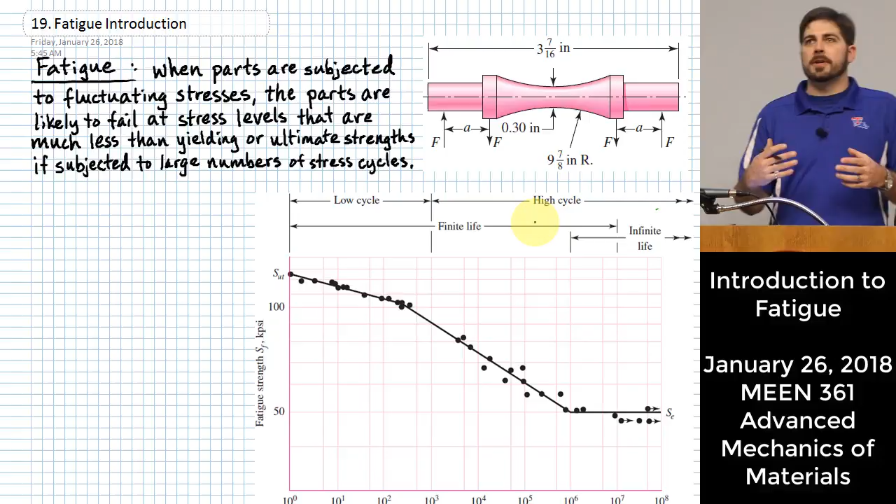It matters to us because one of the things mechanical engineers are expected to do is evaluate things for suitability in certain types of equipment where there are moving parts, where some sort of process is happening, and often that process is cyclic in nature.

Think about, for instance, an internal combustion engine. You've got a connecting rod that connects the crankshaft to the piston. As that crankshaft moves around, the connecting rod, during some portions of the cycle, will carry very large amounts of compressive stress, and in other parts of the cycle it may carry tensile stress. The engine runs at a fairly fast pace, so there can be a lot of cycles of load on that connecting rod in a fairly short period of time.

So what we're talking about with fatigue is basically this: when parts are subjected to fluctuating stresses, you can have situations where parts don't carry just one stress. The stress changes over time, and sometimes it can change rapidly, swinging from compressive to tensile to compressive.

As that stress changes, what happens inside the material is that there are a lot of little micro discontinuities inside the material. Wherever there's a micro discontinuity, it's likely that there might be a tiny bit of yielding at a very localized, microscopic location in that material.

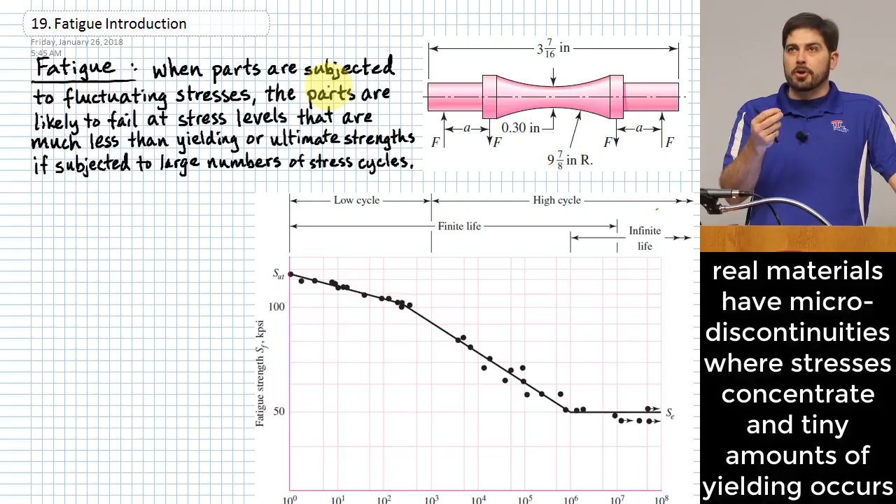So what goes on is that in that material, any place where there might be a little microscopic discontinuity, it kind of behaves as if it's a little crack right there. If you start causing yielding in one direction and another at that micro discontinuity, it actually starts to break more bonds, and the bonds it breaks might be in surrounding material right around that discontinuity.

As you keep doing it, all those little broken bonds that may not have been able to heal back up, due to the ductility of the material or whatever, all those little voids where you don't have bonds tend to start coalescing into bigger voids. And then after a while, your part will break.

So what's interesting is that, going back to this statement, when parts are subjected to fluctuating stresses, the parts are likely to fail at stress levels that are much less than the yielding or ultimate strengths you would have used to predict when it would fail.

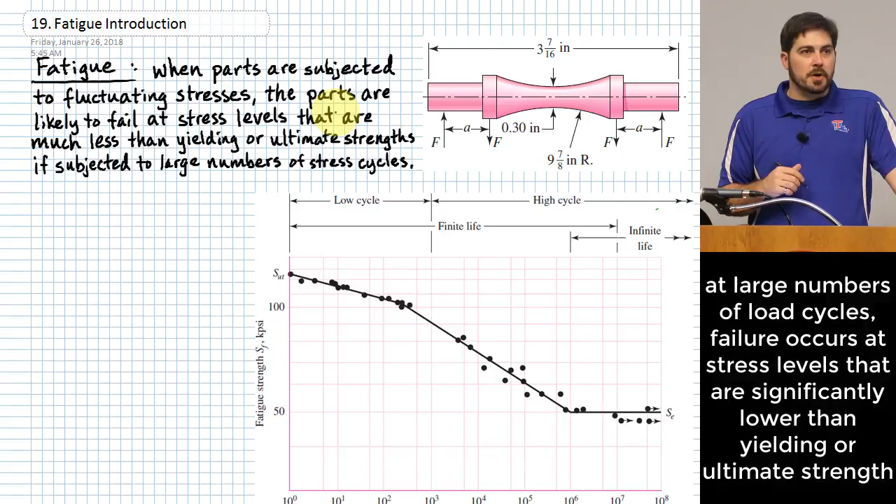And that happens worse and worse as you go to larger and larger numbers of load cycles. What's interesting is you don't even have to be observing any sort of macroscopic plastic deformation. This type of effect happens even when it looks like the material is still remaining elastic, and it doesn't look like you're adding any sort of permanent deformation at any point.

You can still have this phenomena of fatigue begin to happen.

Because we've known about this for a long time as human beings, at some point there were tests that people decided to start running to try to figure out how we can start quantifying this effect, because even to this day it's not understood perfectly well. There's not a perfect analytical model that allows us to quickly know exactly how many cycles at some stress level we will have.

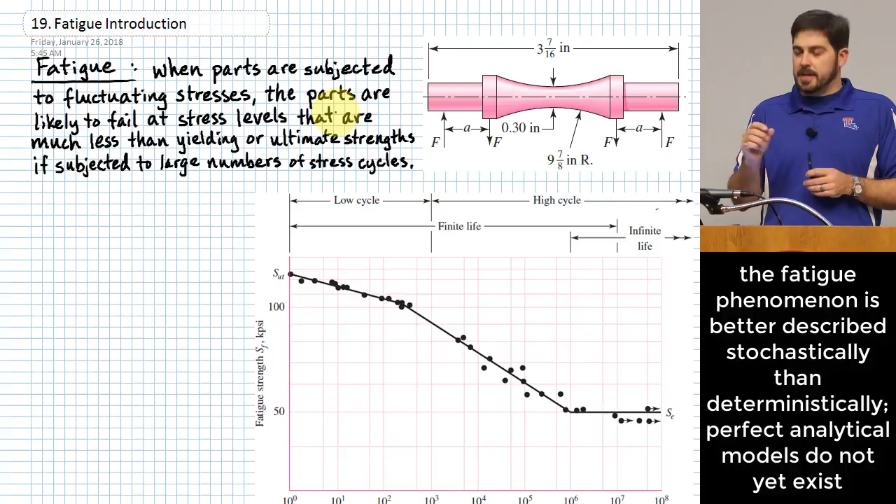Part of that is that, because the best theories have to do with these little microscopic discontinuities in the material, the mathematical nature of it tends to be much more stochastic rather than deterministic. We usually think of a material as being completely isotropic, with the same properties everywhere, and the same properties in all directions.

We think of our materials that way, but in reality, materials have little problems inside of them, and where those problems are and exactly how they manifest, those little discontinuities, can change from piece to piece. So it's very difficult for us to predict exactly how things are going to fatigue.

But having said that, we still need to be able to design things. That's actually something different about engineering versus disciplines like mathematics. In mathematics, you can just give up if you don't have a good model of how to deal with something. In engineering, we still have to make parts. Even if we understand that they could break, people still want products, people still want to be able to drive a car. So you have to continue to design your parts even if you don't fully understand the exact mechanism of how a failure occurs.

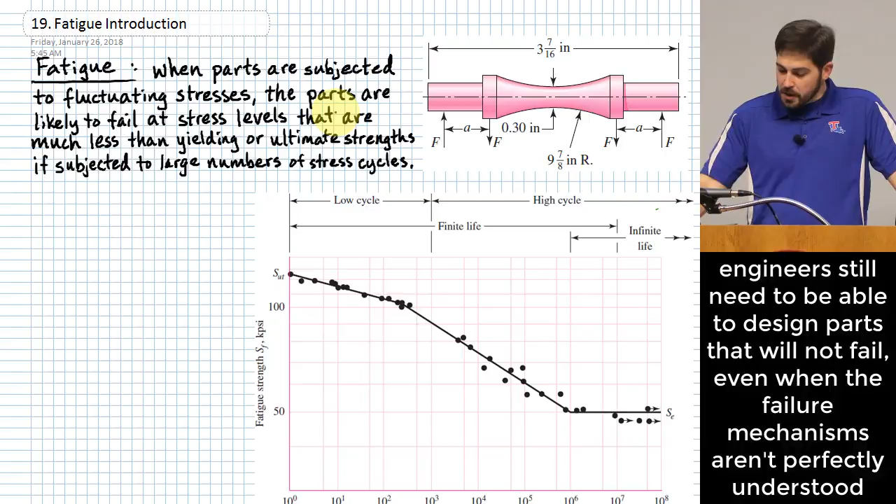So toward that end, experiments have been devised where you intentionally subject a piece of material to a cyclic load. The most common way of doing this is with a specimen. There's a little picture up here that you see.

This specimen is a common shape for a rotating bending test. I brought a little rod of material here. Several of you have probably been in my office and gotten to use this. It's kind of a rubber, and you get to see the different kinds of stress. I thought I'd bring it in to help describe how the stress is cyclic in a rotating bending specimen.

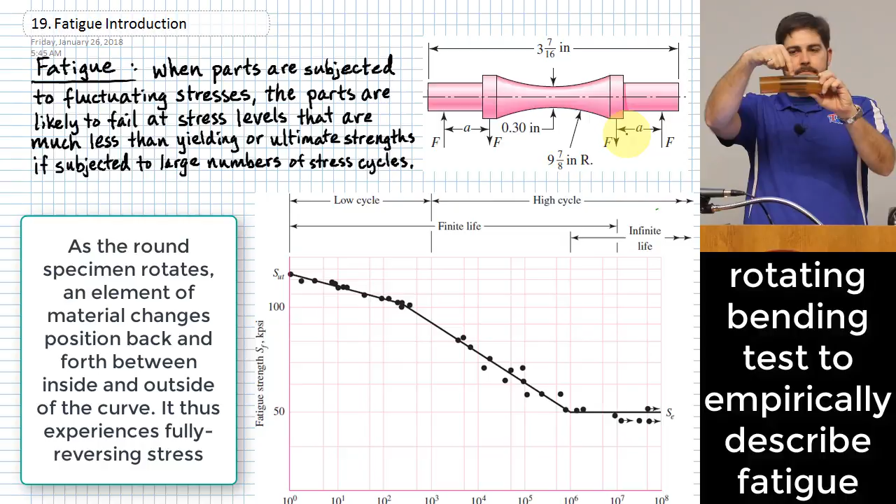So think of it like this. First, they take this specimen. You see here there are two forces of F that are applied at a distance of A, and again on the other side. What you see happening there is going to create a flexure. If you look at a little element of material up on the top of the specimen, it will be in tension when it's in this orientation.

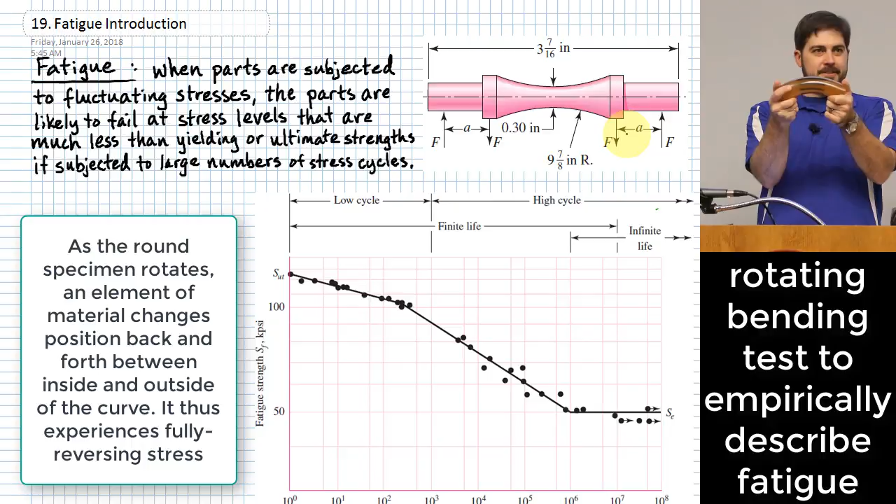What happens is the fixture that is doing this test holds it in that position, but then turns it like this. As I've now turned that, that little element of material is now down here. What kind of stress is it experiencing now? It's compressive. If you keep on rotating it another half turn, now that same element of material has gone back to being in tension. And if this thing is rotating at some pace where you have this bending moment happening and that simultaneous rotation...

...then that little piece of material is experiencing this fully reversed cyclic load. That's a term we will begin to use here: fully reversed. What we mean by that is it's the same stress magnitude on one end of the range as on the other. It's going to be tension on one end of the range and compression on the other end of the range. I'll go ahead and mention there are a few other kinds of cyclic loading that can happen.

What if I had a piece of material and I was applying an axial load to it, and I pulled on this and then released, pulled on it again and then released? What we would call that is a repeated load. It means that we are not reversing it. We don't ever put a compressive stress in it. We just keep on pulling and then releasing, pulling and then releasing. And so there's a different nature to how that one will fail.

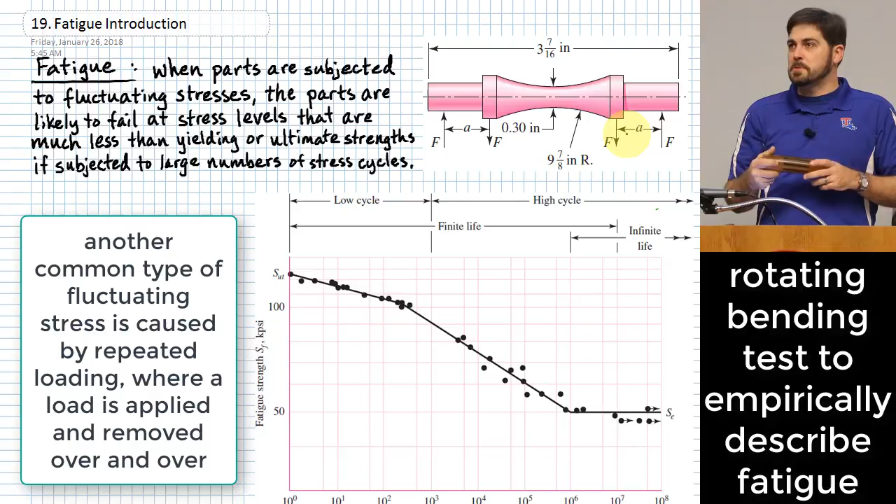We're going to get into some theories that allow us to deal with situations where we don't have maybe a specific type of stress profile. So that's what we're talking about: this is the rotating bending specimen. And what you see with this little chart shown right here, this is a really fundamental chart that we have to deal with to understand the outcome of the rotating bending tests that are done.

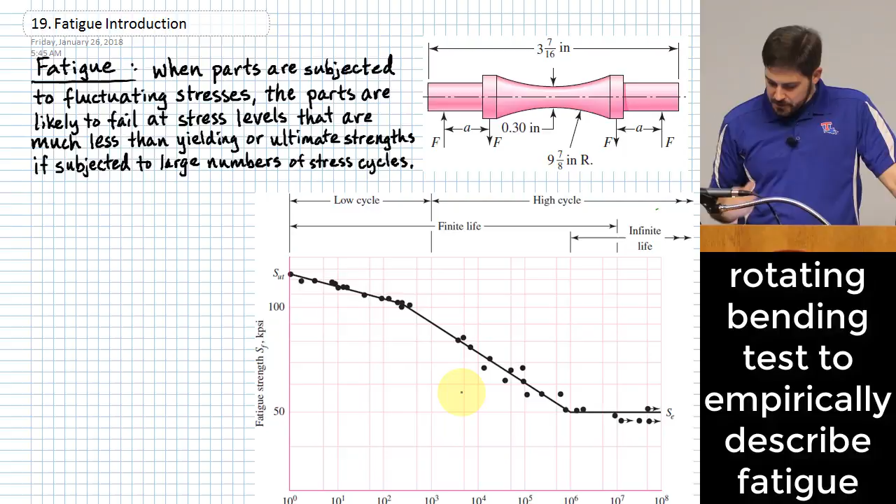So what you see here are all these little data points. These represent ostensibly identical specimens: same type of material, same exact dimensions. The only difference being that for each of these specimens, they are loaded to a different amount of load.

So they basically change the Fs that are applied, and then they put them in the machine and run it. What they plot is basically how many cycles the specimens take at that particular stress level. They're able to calculate the stress level based on the dimensions A and the force F, and they can plot that stress level as one dimension and the number of cycles as another dimension.

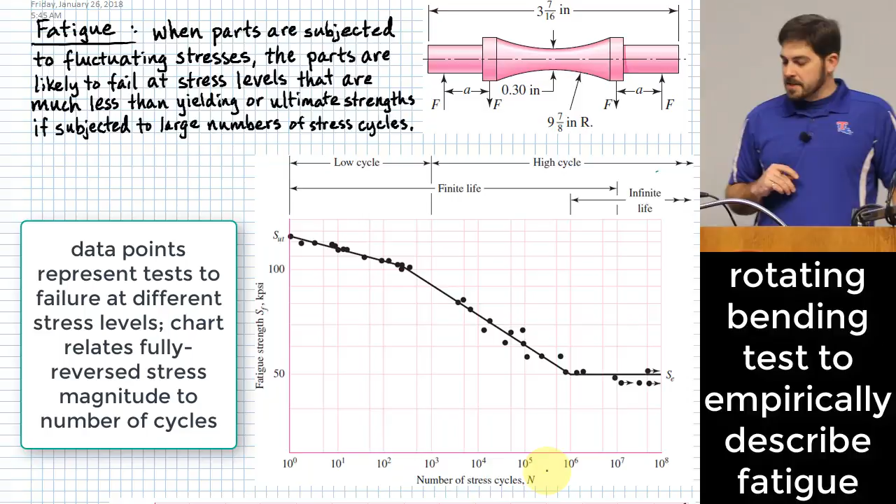The chart you're seeing up here is for steel. As they do this, the shape of this chart for steel winds up being fairly uniform. It's like we don't necessarily care exactly what kind of steel or exactly what strength level of steel—the general shape of this curve stays roughly similar as long as you're dealing with steel.

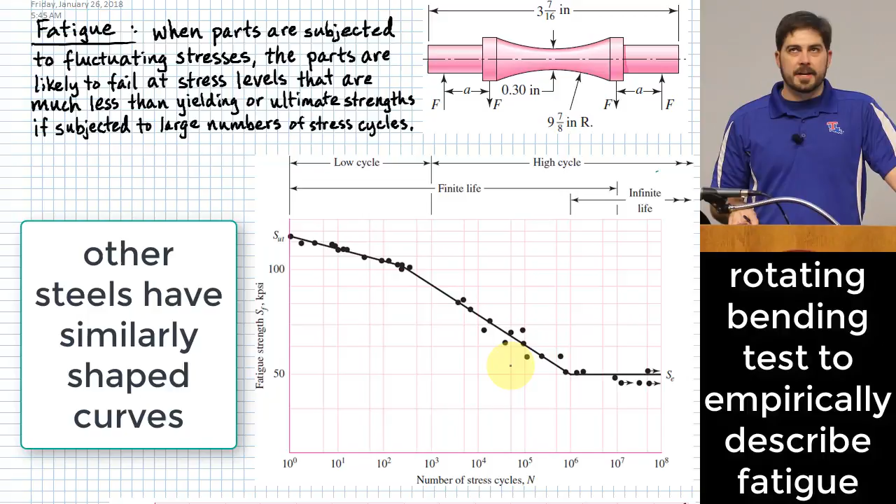So what we're going to do is apply some thinking about how we can use this chart to predict the behavior of materials that are loaded cyclically. That's where we're going to go. A couple things to point out here—one of the most obvious pieces is this range of the chart way out here.

See where I just drew that red line? This is a feature of steel that exists in very few other materials. Steels have this characteristic that if you let this stress value go low enough, there will be a point at which it doesn't matter how many cycles you put on it. You can essentially run the number of cycles as high as you want, and it will not have really any additional effect on when the material will fail. In other words, you can go on forever and ever, as long as you hold this stress level below a certain threshold—it can essentially last forever.

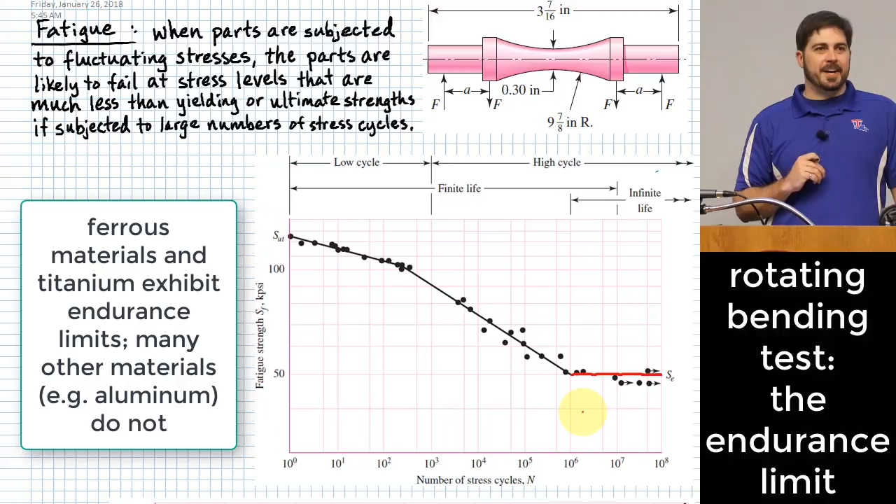What's interesting here is that number you see for this steel—it looks like that occurs at about 1 million cycles, and that is uniform enough that we're just going to take that as a universal value. We'll basically say if a steel is going to last 1 million cycles, then we're going to assume it's going to last 1 billion or 1 trillion. If we've designed something where it'll last 1 million, we're saying it'll last however many more you want. There is some debate about whether it happens at the million or at 10 million, but we're in here just to get the idea of how to do these problems, so we're always going to just take that value to be 1 million.

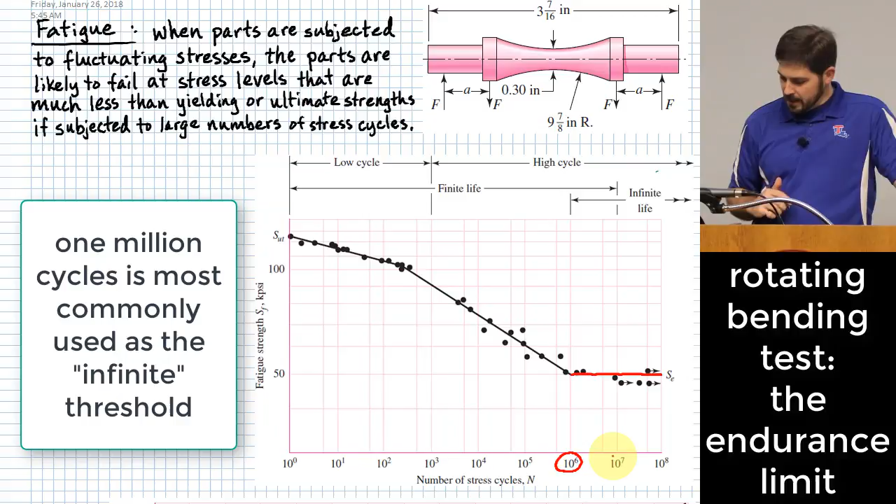And then what you see here, this height of that curve right there, is called the endurance limit.

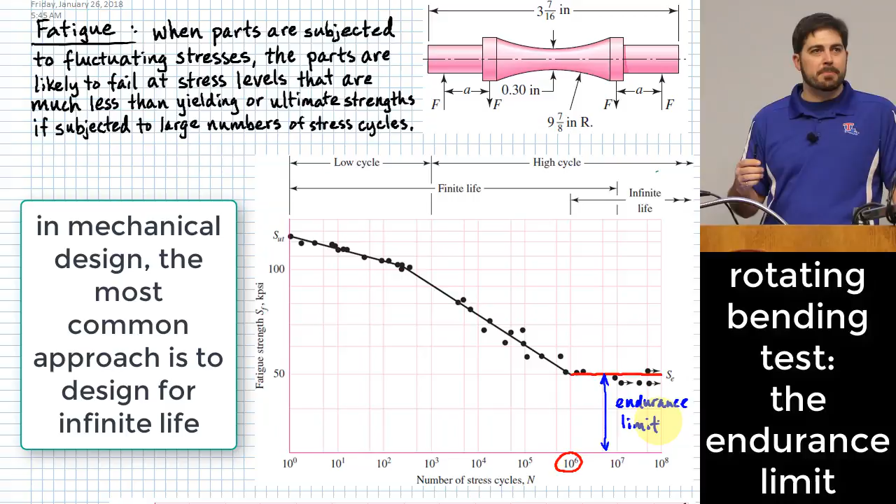I'll make the comment here that the endurance limit is a big deal to us because the most common way to do design with steel is to just decide that you are going to try to make your part last forever. It's uncommon for people to decide they want their part to last some finite number of cycles if you're designing in steel. You sometimes don't have that luxury if you're designing in some other kind of material—you sometimes have to do a more finite design approach. But with steel, we're generally designing out here for this endurance limit.

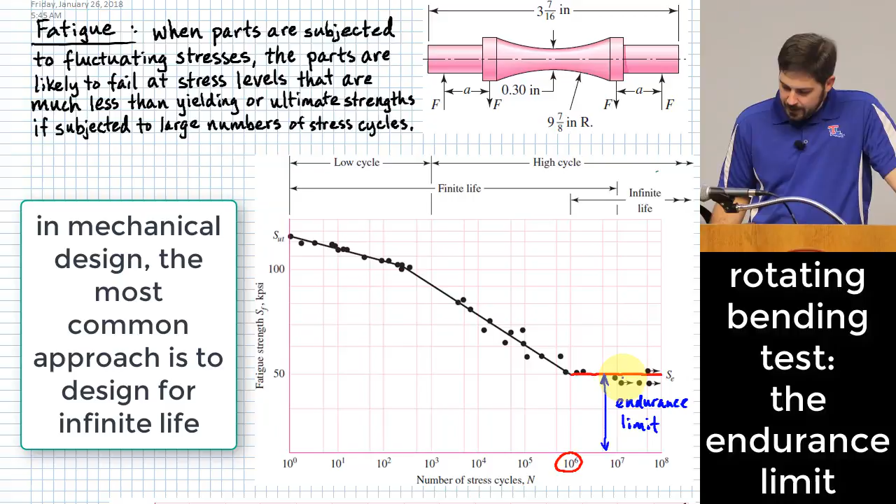So then one of our first questions is, is there a way we can estimate what that endurance limit is? The answer is kind of multi-pronged. One is, if you've had someone do a fatigue test for your specific kind of material, well then one of the things that comes out of that is probably going to be a really good estimate of endurance limit.

We're going to add another constraint on ourselves for the types of problems I'm most interested in you being able to solve. I want you to be able to design for steels where you only have one piece of data about that steel, and that piece of data is your ultimate strength. That's one of the pieces of data you will have for just about any kind of material you're going to design with—that's an easy one to have. You will always basically have your ultimate tensile strength for your material.

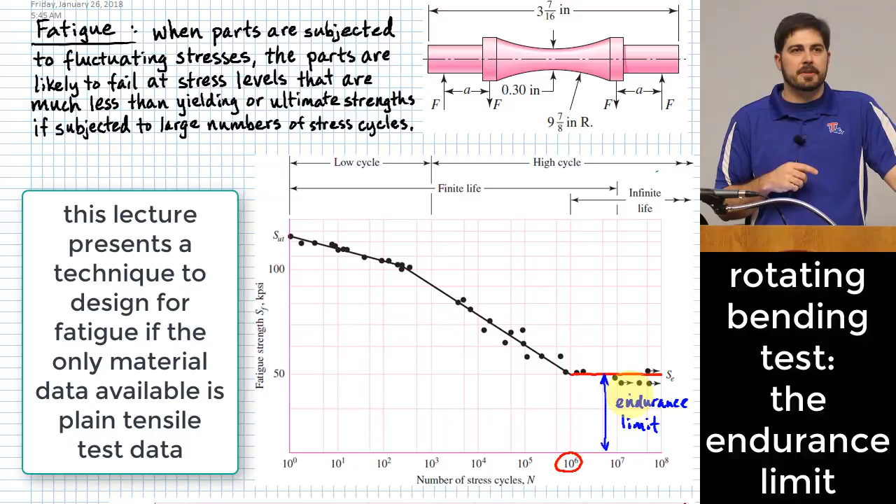One helpful thing is there's another chart in the textbook that allows you to make an estimate of what the endurance limit is going to be if you happen to know the ultimate tensile strength. These are basically a lot of different kinds of material where they did these kinds of tests, and you see that even though it's not fully deterministic, there is definitely a trend, and kind of the middle of that data is right through there like that. The way we can interpret that—that line goes up like this, and there comes a point where the data starts scattering down here lower.

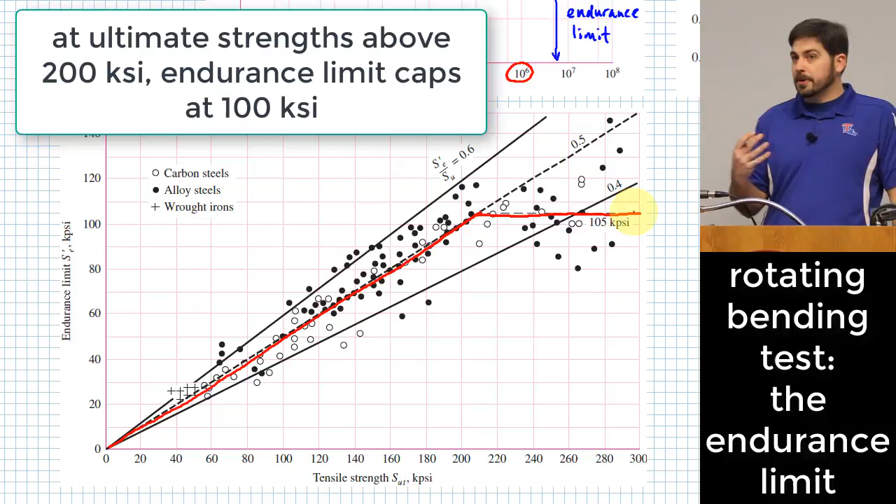You see that? Why does some of it go laterally and some of it go... there's the best explanation for this. I'm not sure that people understand it perfectly well, but probably the best explanation for why it cuts over like that is if you look at the strength of these materials.

Somewhere around 200 KSI, that's a really strong steel, a pretty high strength value for steel. And what happens when you get steel to high strength values is it usually means your steel has gotten more brittle.

You usually aren't able to keep your ductility all the way up into those levels. Having more ductility is helpful in terms of being able to withstand, because if you don't have ductility, then when your bonds break, they're more likely to just stay out of the game. So that's probably the best explanation for why it cuts over like that: these high levels of strength mean your material isn't quite as capable of self-healing.

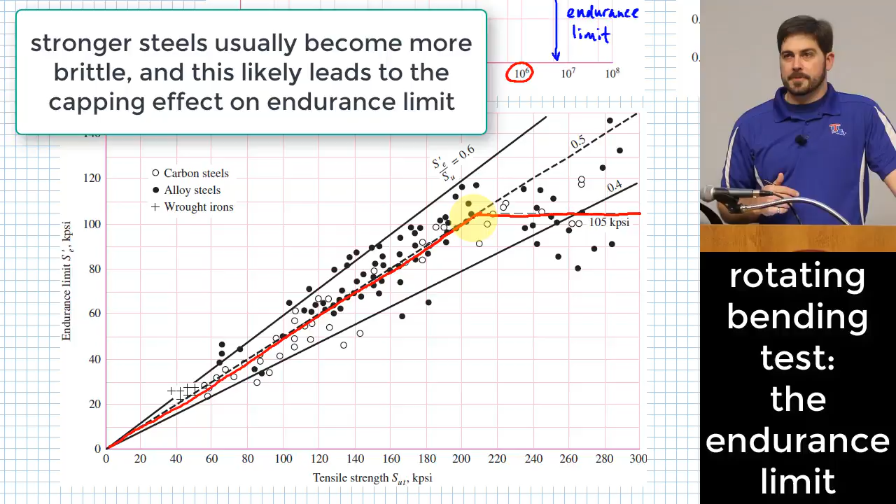That's not really an official term, but that's sort of how materials behave when they are ductile. So this chart gives rise to the estimate used in the book, and they use this SE prime. I'll state it only for US units: this is going to be half of the ultimate strength, as long as your ultimate strength is less than or equal to 200 KSI.

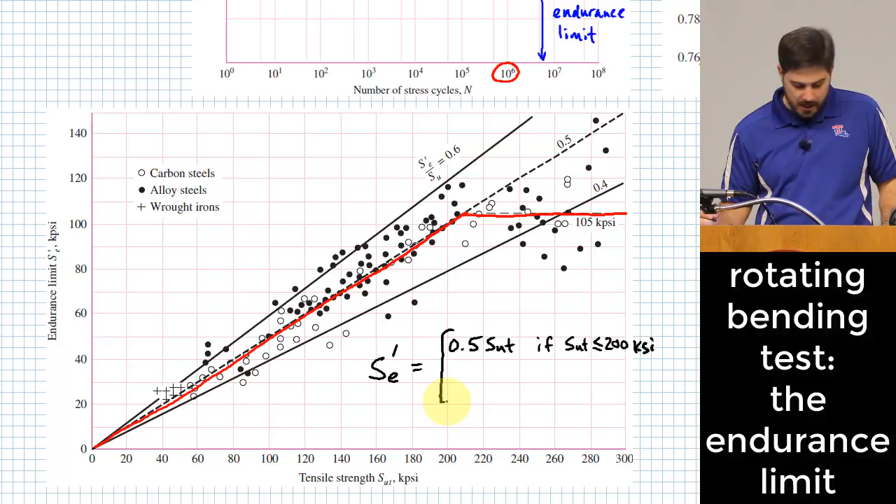Slide all this over a little bit. Otherwise, we just cap it off and say we're only going to let it go up to 100 KSI if it's any higher.

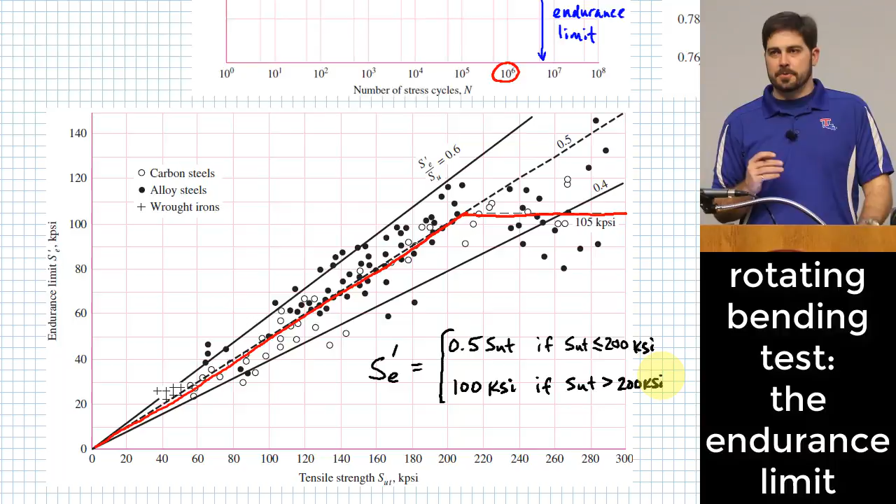So this is the first thing we look at with respect to this chart: understand that there is this stress level, and as long as we don't go above that stress level in our designed parts, we can expect that the part will last forever. There's going to be a little asterisk next to that fairly soon, but I'll leave it there for now.

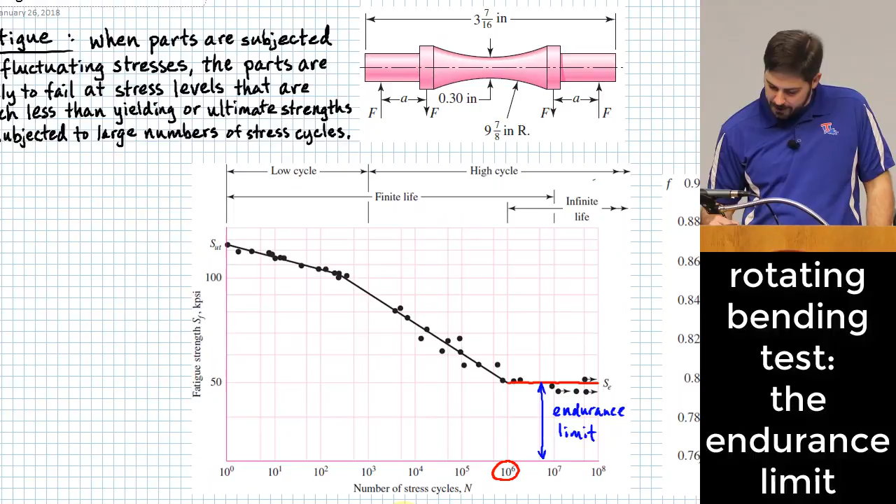The prime that I put on here means this is if you have a highly polished, rotating bending specimen, at room temperature, and there's a few other things as well. It's basically like, do you have the perfect case? It turns out that when they do these tests, if they do not perfectly polish the surface of this material, it very rapidly changes the result. Why do you think that might be?

Any sort of roughness on the surface is basically the beginning of a crack, and you're creating these little microscopic stress concentrations anywhere there's roughness. So if you make it perfectly polished, perfectly smooth, then these are the data points that you get. One of the things we will deal with in the next lecture is what do you do if you have material that's not.

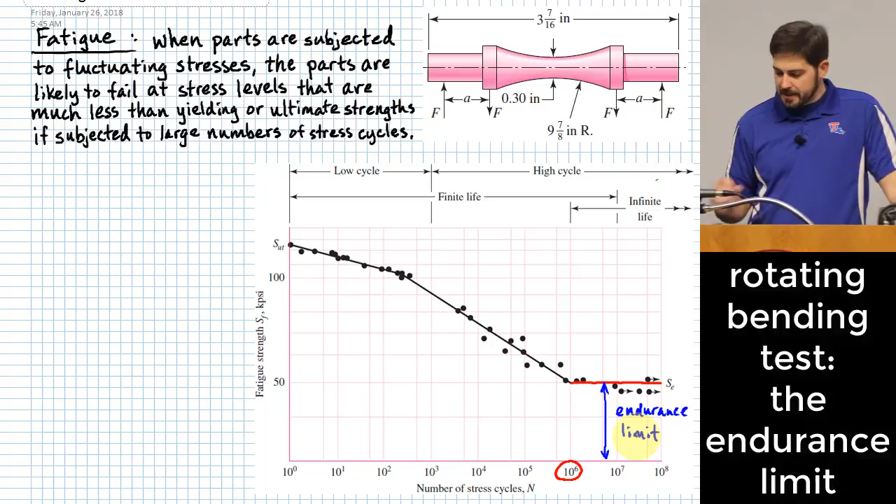Okay, so we will deal with that question at some point. But what we're doing right now is that this is the endurance limit we expect for a perfectly polished rotating bending specimen. All right, so the next thing we need to do is identify that the two axes of this chart are on log scales.

So this is an important feature that we have on a chart like this, and it means that the relationship between your variables doesn't really behave just according to straight line equations. It's a straight line, we model this with a straight line on log scales.

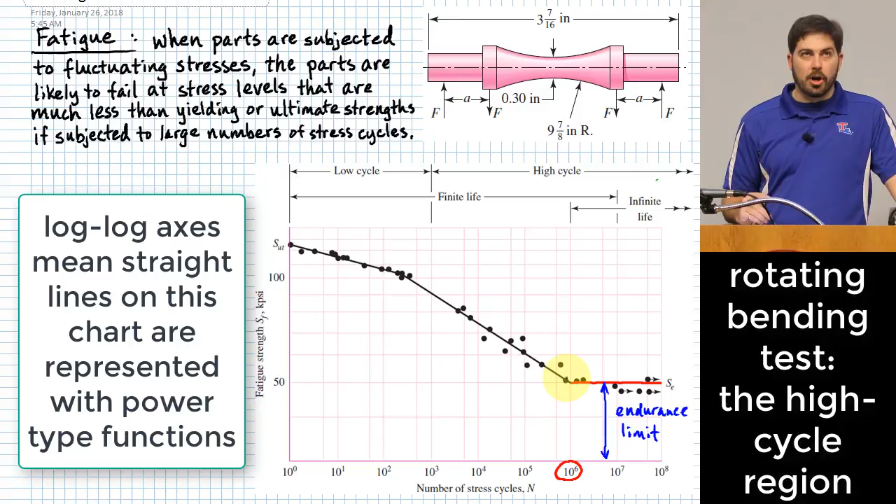And we see that on these log scales, there's a couple of points where it looks like there are some breaks. Now, one of the things I've never really liked about this figure, although I haven't ever tried to reproduce it, is that it is generally accepted that the breaks in this curve will occur at roughly 1,000 cycles and 1,000,000 cycles. And it looks like for them, they used a straight line up to somewhere in here.

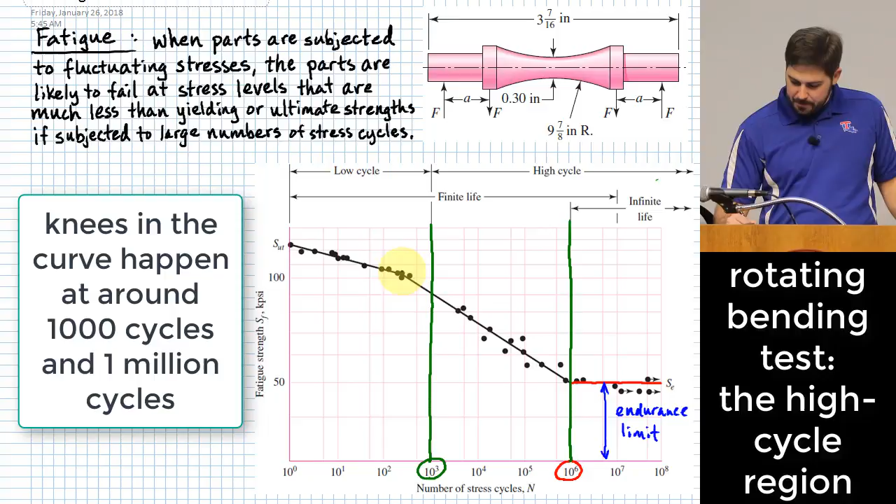What we're going to do is we're going to use a curve that is essentially like this. It goes to here, and from there down to there.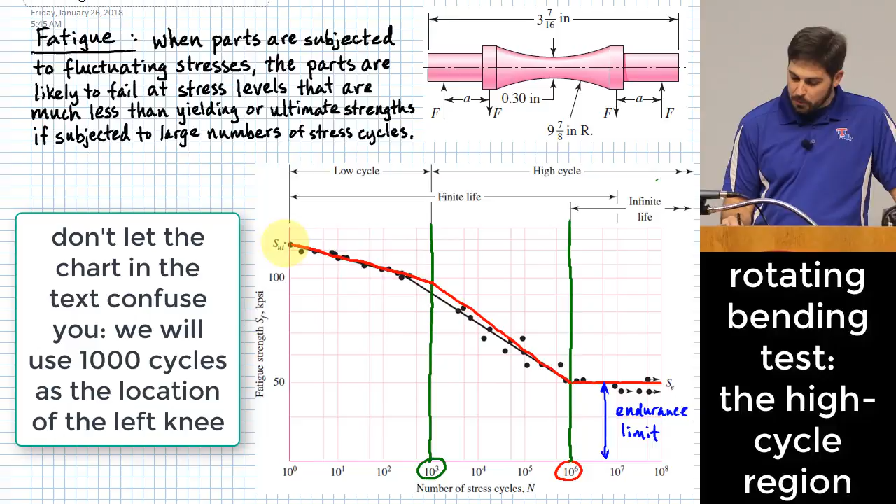I know it's a small distinction, but it can cause confusion if you're looking at this and think, well, they didn't really put it right at 1,000 cycles. We're going to use 1,000 as that point where the curve breaks, not where the specimen breaks, but where the curve has that break point. This matters because we're going to have different tools for modeling each segment of this line.

We sort of skipped over this section because it's not something we use a lot, but there's a section on the strain life method. In that section they come up with a formula, or one we can manipulate a bit to get this one, where the fatigue strength prime, meaning for a highly polished rotating bending specimen, is equal to sigma prime sub f, called the fatigue strength coefficient, times 2 times the number of cycles raised to the power of b. This is the basic form we assume controls the middle portion of this graph.

This middle portion of the graph is what I typically call the high cycle region, above 1,000 cycles but below 1,000,000. The low cycle region occurs where it's less than 1,000 cycles, and we have different terms we're going to come up with for each of these.

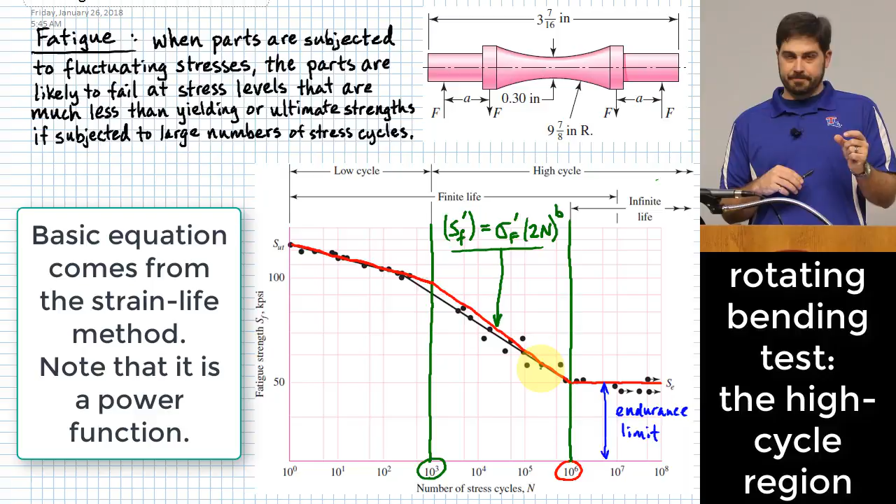So here's what we'll do. We are again trying to figure out how to design for parts when the only piece of data we've got is the ultimate strength. Here's where we'll go with that.

The first thing we'll do is identify a parameter that describes where this breakpoint occurs—where does this thing actually occur? The height I'm identifying here, we can call S prime sub F, at 1,000 cycles.

Another height we can identify is S sub ut, and that one we don't have to do anything special to—it's just S sub ut. So what we're trying to come up with is this parameter the book calls F, the fatigue strength fraction. F is just the fraction of S prime F at 1,000 cycles—your fatigue strength at 1,000 cycles—over your ultimate strength value, and that gives you F.

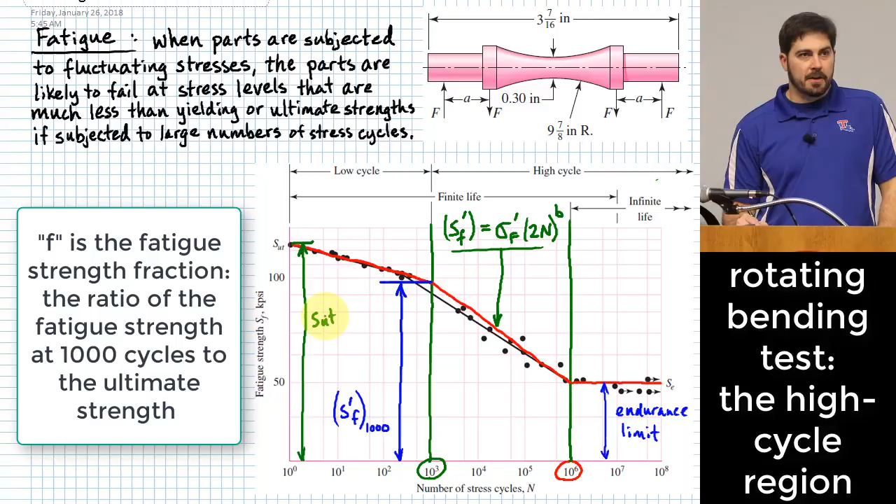What you'll see is that it might be roughly 80% or so, 80 to 90%, and this describes where the curve breaks over. What we need to do is come up with a way to find that F fraction if the only data we have is ultimate strength. It won't be easy, but we're going to do it.

So we'll say your S prime F at 1,000 cycles, which we can write as sigma F prime, your fatigue strength coefficient, times 2n—what is n at 1,000 cycles—raised to the b, we don't know b yet but it's of this form, and this is equal to the fraction: the ratio of S prime F over S sub ut, times S sub ut.

Does that make sense? All we're doing is writing in math what I just said: that fraction times ultimate strength should equal whatever our value is for fatigue strength at 1,000 cycles.

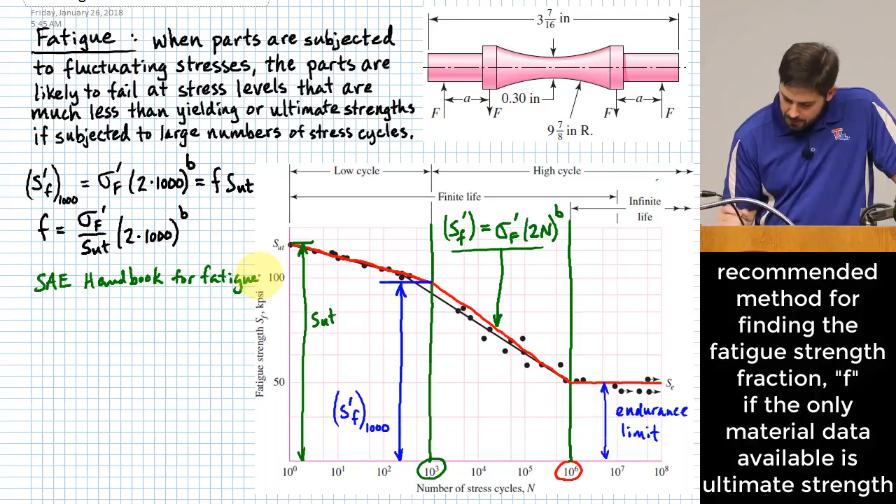...there's a relationship where you can find this fatigue strength coefficient if you know the ultimate strength. It's the ultimate strength plus 50 KSI. I've never checked that myself, but that's what they have in the SAE handbook, so we're going to use it. So now we have this value for sigma F prime, the fatigue strength coefficient. What else can we do?

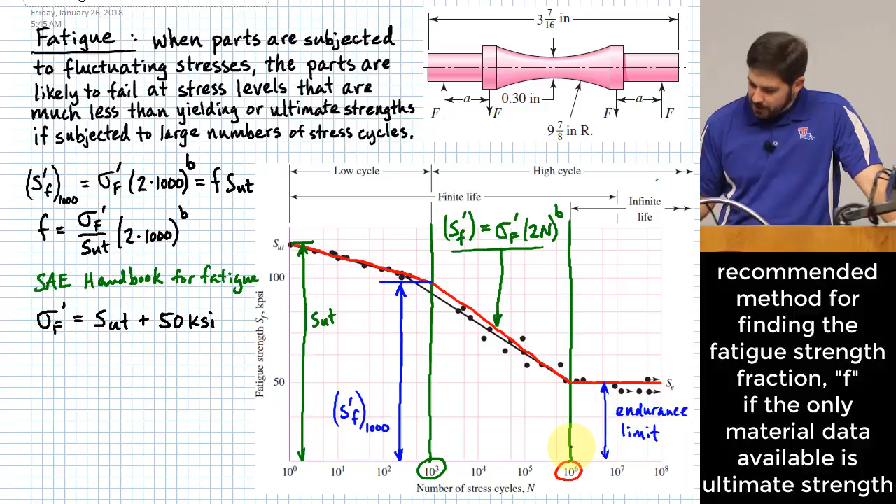Okay, another thing we can do is analyze what this curve does where it hits 1,000,000 cycles. This number, since it's not always exactly 1,000,000, we call N sub E, meaning the number of cycles we're assuming is the endurance number of cycles. At N sub E, we should be able to write another expression just like the one we wrote up here, an S sub f prime at 1,000,000 cycles, wherever the location is where you reach that number of cycles.

Okay, what would that look like? Sigma f prime, 2 times N sub e, raised to the b.

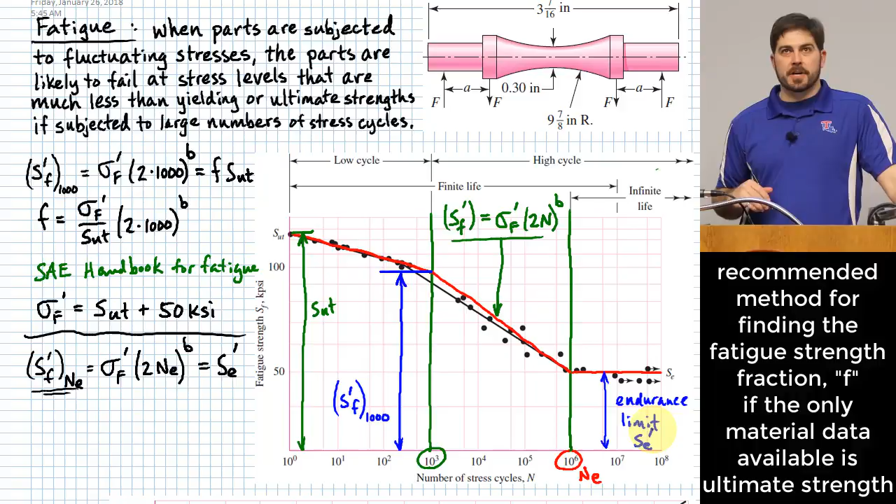Now there's another way that we can write this number over here. What's another way we can write that one? We just said that this endurance limit over here is S sub e prime, so that is that stress value. Let's see here, I need to make a little bit more room for myself.

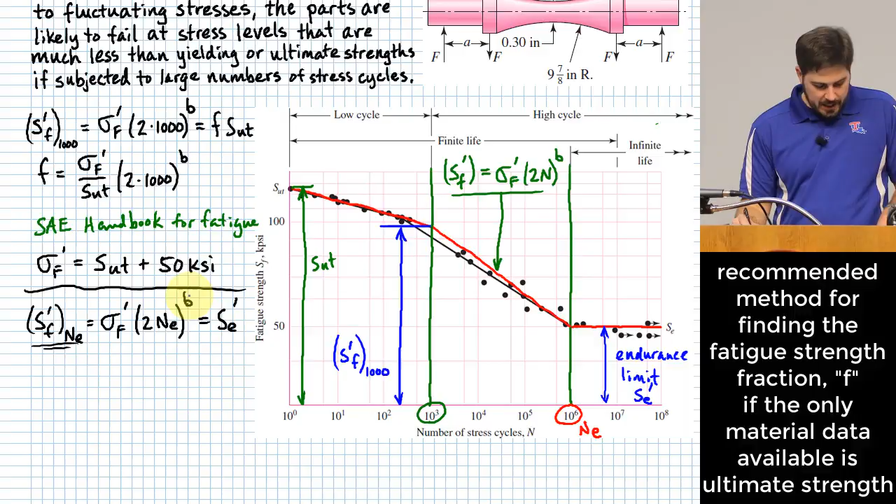What that means, if I want to actually solve this thing for B, it means that my B can boil down to the negative log of the fatigue strength coefficient over the endurance limit, divided by the log of 2 times that number of endurance cycles.

And what you'll see here is that now all of these values are defined. We generally use 1,000,000 for n sub e. We can find S sub e based on that half relationship I talked about earlier, and our fatigue strength coefficient we can find with our SAE handbook. So this is basically the process we have to go through: find B, plug it into this expression, and use that to find F, which we can find purely as a function of the ultimate strength.

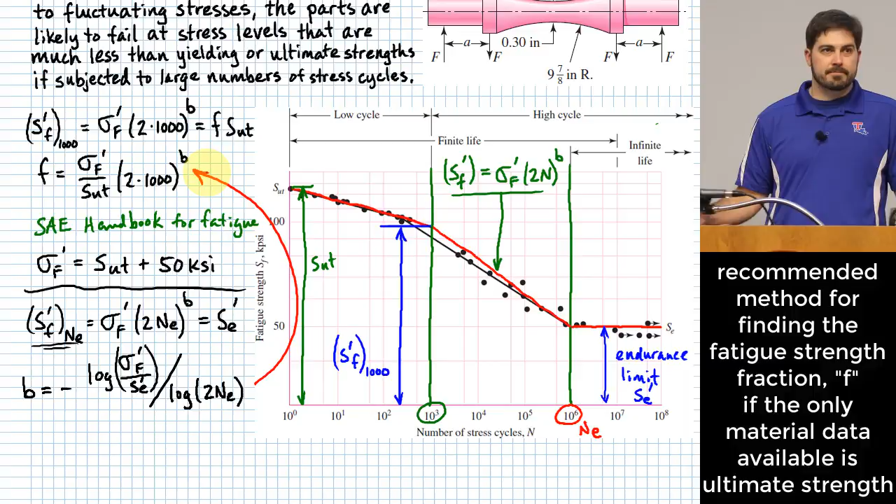Because it's a single variable controlling this whole method, it's possible for us to just plot the result. Depending on the level of precision you're trying to get out of this factor F, sometimes it's okay to just look on here, and if you know the ultimate strength for your material, you can read what that ultimate strength is along here, go up to the curve, and figure out what this fraction F is. This whole curve was generated using this technique I just showed you.

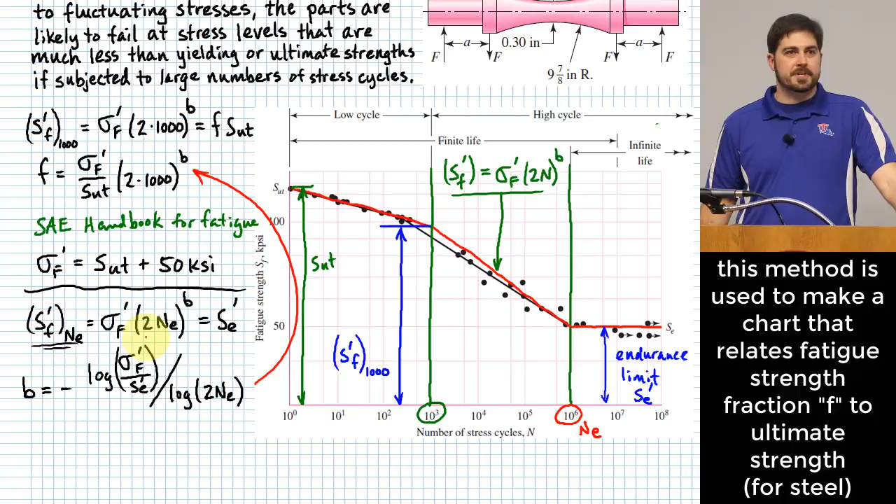All right, we'll do an example problem in just a second. I'll show you how to deal with that.

Yeah, that's the notation they use here in the book, and I just generally try to match it. Ultimate tensile, that's what the UT stands for. So is that assuming that the compressive strength and the tensile strength are the same? Yes.

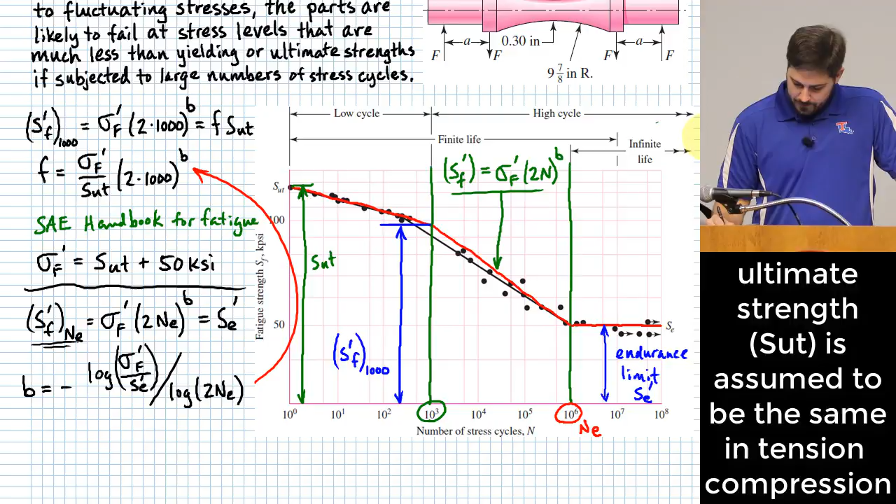All right, we have another couple of interesting things we should deal with here as well. One of them is this: what about the low cycle region? The thing is, at the low cycle region there is still a relationship between fatigue strength and the number of cycles, and it's still basically given in the form where there is a variable we need to find, A, multiplied by n to the B.

So whenever you have a log-log curve, straight lines on that log-log set of axes will be of this form. So what we need to do for the low cycle region is determine how we figure out what A and B are, so that we know what our strength is as it pertains to the number of cycles. Well, as we look at this curve, there's one spot that's really easy for us to deal with.

How many cycles right there? One. Okay, so that tells us, and the value then of the strength is what? Ultimate strength. So that tells us that S sub ut is going to be equal to A times 1 to the B. This tells us here that A is equal to S sub ut in the low cycle region.

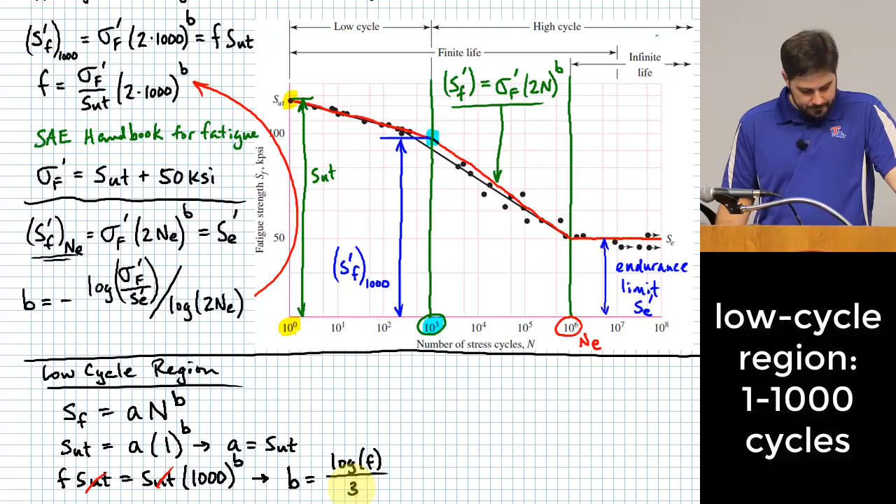So there's how we deal with the low cycle region. There's one other thing I should mention here as well. I mentioned early on that the endurance limit we've identified is for a perfectly polished rotating bending specimen at room temperature, and there are a few other things that could control whether or not our endurance limit changes in different ways. We'll get into all those later.

What happens once we have evaluated what's called a fully corrected endurance limit? The answer is this curve actually changes shape somewhat. You can imagine that the new curve, after you've identified the fully corrected endurance limit, ends up having an endurance limit that's maybe a little bit lower. Which means this curve actually changes.

So what we'll do is mention again that it's of the form S sub F equals A n to the B. I won't spend a lot of time deriving these. They're actually not that hard to get to if you need to, but the A you have here, and again this is in the high cycle region, is going to be F times S sub ut squared over S sub e, and this is not a mistake that I'm leaving the prime off of S sub e. Whenever we get ready to fully correct our endurance limit, we will no longer put the prime on it. We'll just call it S sub e. So this is fully corrected.

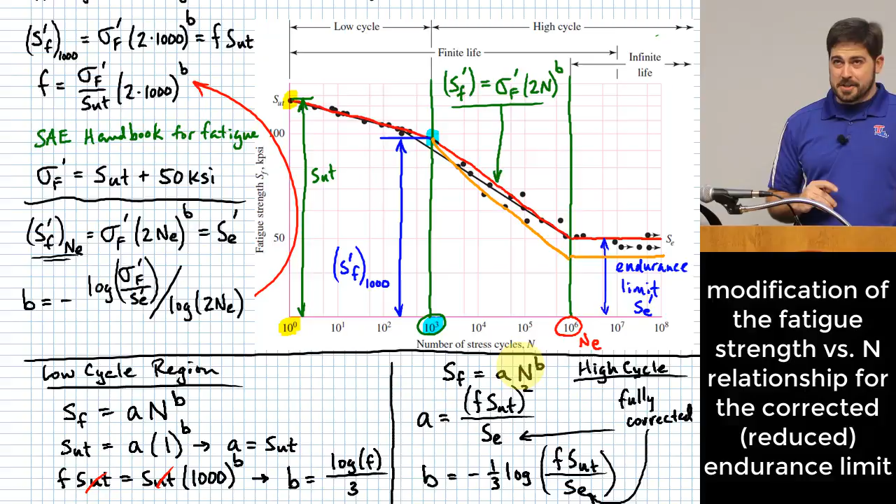All right, let me explain it a little bit. So what we have here, we have a shaft that is mounted in some bearings. These are ball bearings, and I'm showing half of them so you can see how it's mounted. By the way, I did post this example on Moodle this morning, in case you want to go back and look at it. We're saying this shaft is made out of a polished material, so I'm trying to help motivate the idea that I'm not going to deal with any of my correction factors for my endurance limit just yet.

It has an overhang of 8 inches. The diameter of the shaft is 0.8 inches. The shaft is rotating, and there's a 675-pound flywheel hanging on the end of the shaft at an 8-inch overhang. The material is 1141 steel. It has been quenched and tempered at 1,000 degrees Fahrenheit, and it has a polished surface, as I mentioned a second ago. What we want to do is find the number of revolutions we expect this thing to last before it breaks the shaft.

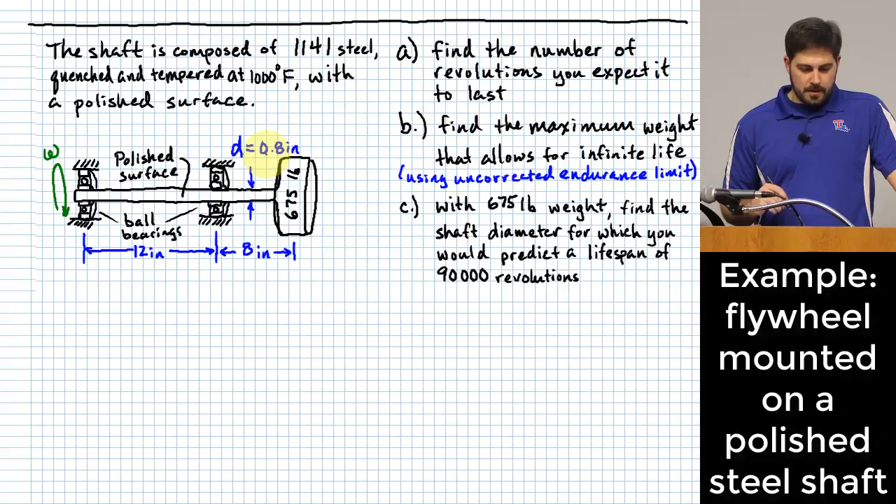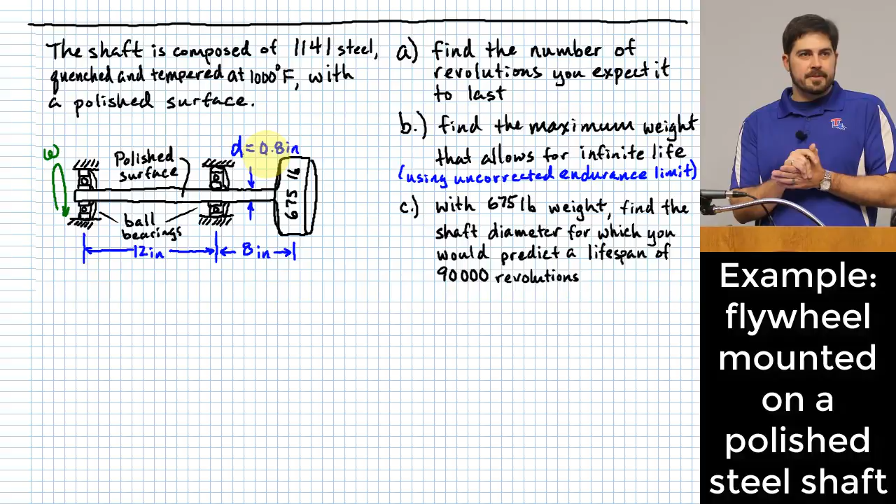And I need to figure out a new diameter. Instead of 0.8 inches, I need to figure out a new diameter so that it lasts those 90,000 revolutions. That's my target. All right, fair enough? What do you want to do first? How about this: we should be able to fairly easily figure out the flexural stress at our worst place, given what we know about this problem. Is that correct?

All right, so I'll do that right over here. Flexural stress, MC over I. Okay, for us, what do we have for M?

Okay, where's the maximum bending moment going to occur? I think you might be saying right here. Yeah, this is where your critical location is going to be. All right, so we need to take the amount of weight we have hanging off the end and multiply by 8 inches.

All right, C is what? Yeah, so C is basically the radius of the shaft, and we'll have to take the 0.8 inches, divide it by 2 to get the radius.

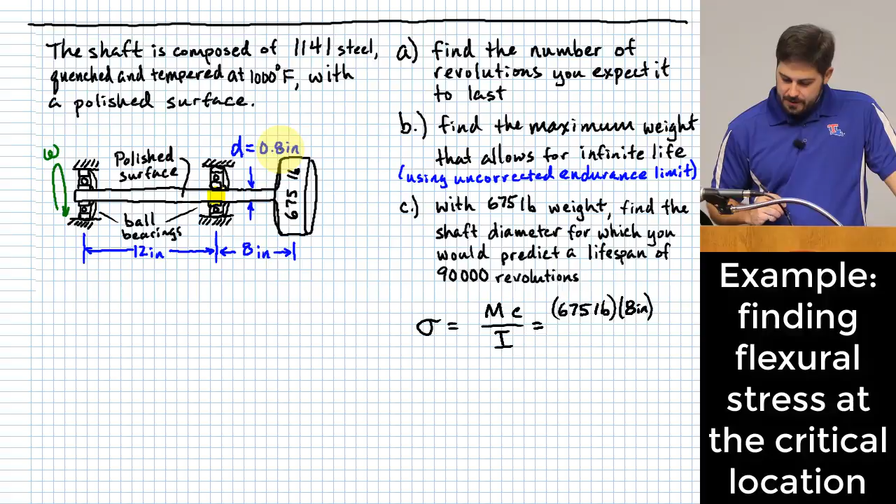Okay, and what about I? Pi over 64 times 0.8 inches to the fourth.

Okay, and if we punch these in, the stress that we calculate is 107.43 KSI.

All right, I'll tell you what we need to do now is we need some data about this material. Is this a lot or is this not a lot relative to the strength of our material?

All right. I will tell you that this is in table A21. It's right at the bottom of the page. This material that's tempered at 1,000 degrees Fahrenheit has an ultimate strength value of 130 KSI.

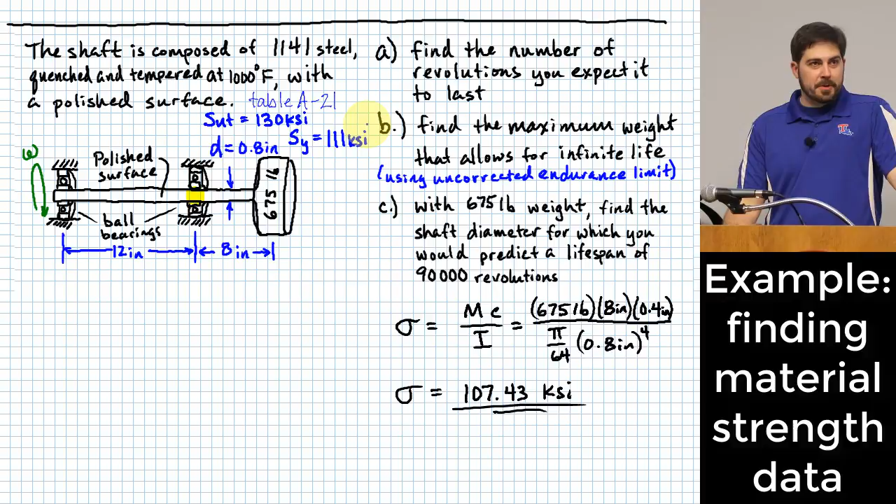This is actually one of the things that we check for sometimes in these fatigue problems is we sometimes check for first cycle yielding. In other words, before you even start cycling it, is it just going to make the thing yield? All right, so what we're saying here is that it looks like we're fairly safe on first cycle yielding.

We are likely, though, if we think about the 130 KSI, if we have S sub UT, let's actually go up and look at our chart for just a second. Okay, 130 KSI puts us right here. All right, looks to me like that's a little bit above the midpoint.

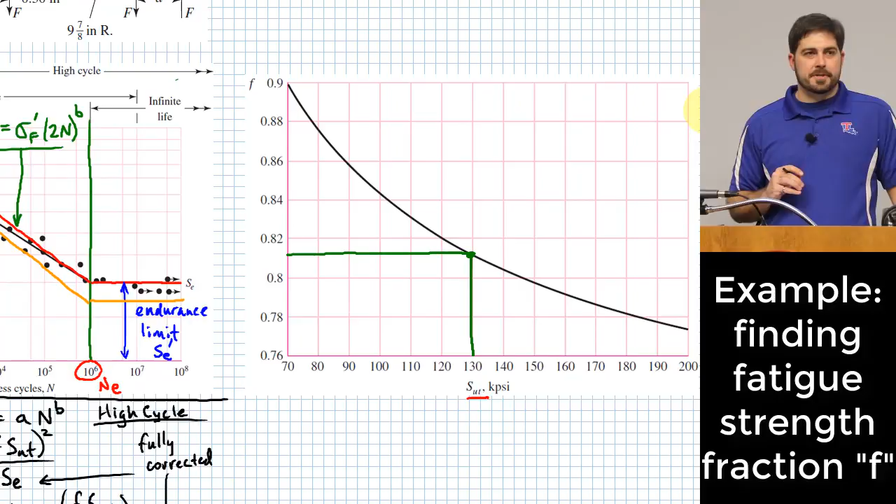And so let's say that that's about 0.81. We'll figure it out exactly in just a second. So that's about 0.81-ish. Do you think we're in the low cycle region or high cycle region? Let's figure it out exactly, okay? We don't need to guess.

That'll be the next thing we do, is we have to run through this technique that I just set up here. All right? So the first step that we will do, I guess, is we will figure out the fatigue strength coefficient. It's 130 KSI plus 50 KSI.

All right. The next thing we'll do is figure out S sub E prime. Right? That's our uncorrected endurance limit. It's going to be equal to 0.5 times what? 130 KSI. And that gives us what? 65 KSI.

All right. Then what do we do? Okay, we can figure out what that exponent is, B. B is going to be equal to minus log base 10 of sigma F prime. Okay, so that's 180 KSI over S sub E prime. This is over log base 10 of 2 times a million.

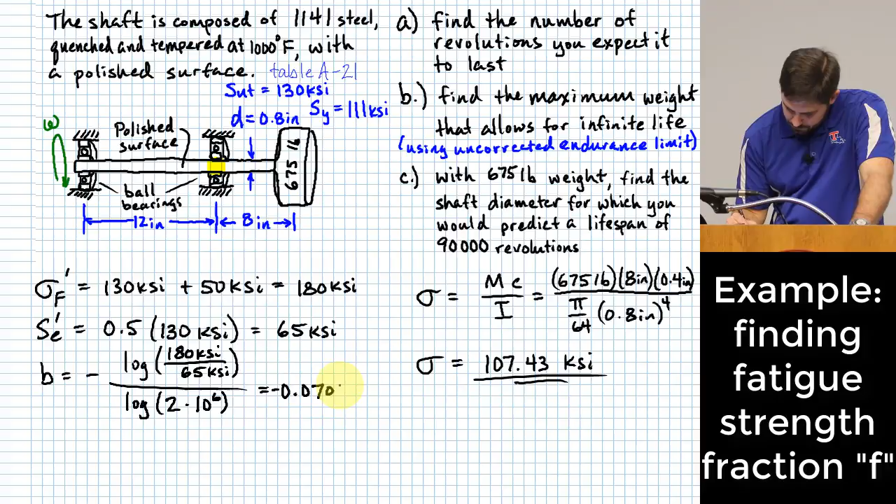All right, then the last step is our formula for F. F ends up being our fatigue strength coefficient. Tell you what, I'll just put that in there, 180 KSI over S sub UT, 65 KSI, multiplied by 2 times 1,000, raised to the negative 0.0702.

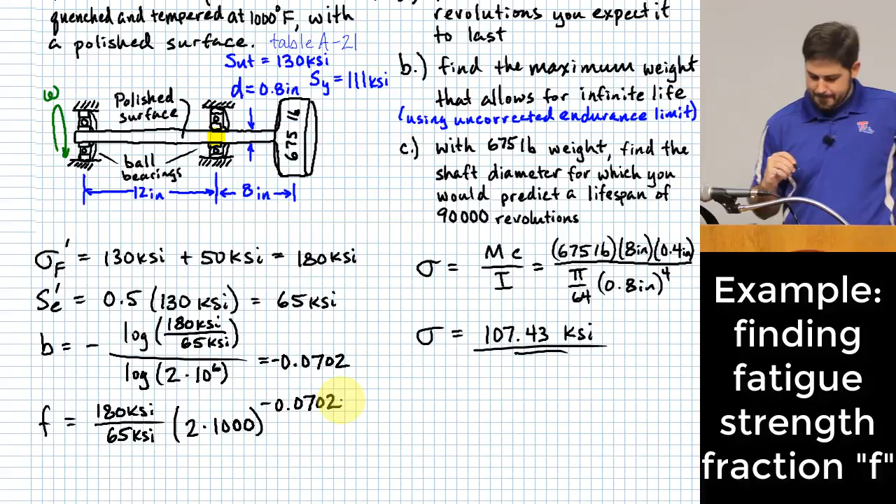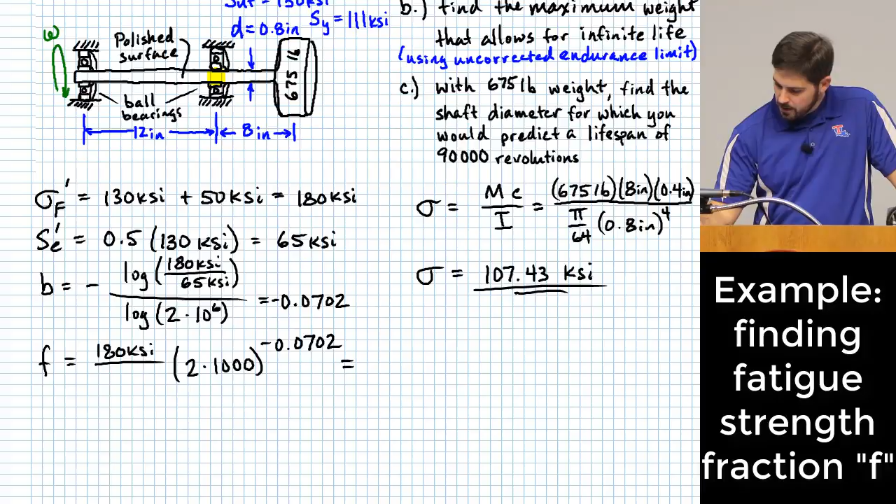Yes, sir. The formula that I'm going to is up here. Oh, S sub UT. Thank you. Yeah, you are correct. I put in S sub E prime, and the formula actually calls for S sub UT. Good catch, Tom. I have it correct in my notes here. I just wrote it wrong.

So, all right, so that means that I end up with an F value of 0.81205.

Okay, which tells me that my break point from being low cycle to high cycle, okay, so this is basically that S sub F prime at 1,000 cycles. This ends up being 0.81205 times 130 KSI.

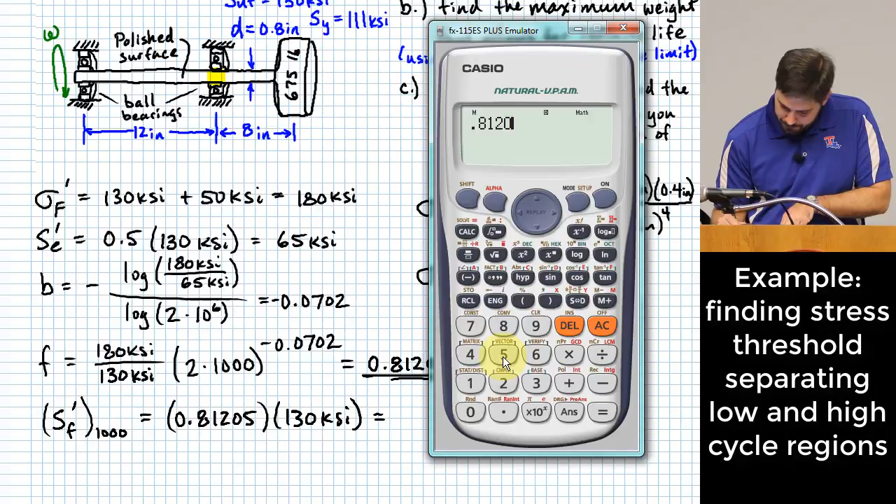All right, I forgot to actually do that particular calculation. 0.81205 times 130. So 105.6 or so.

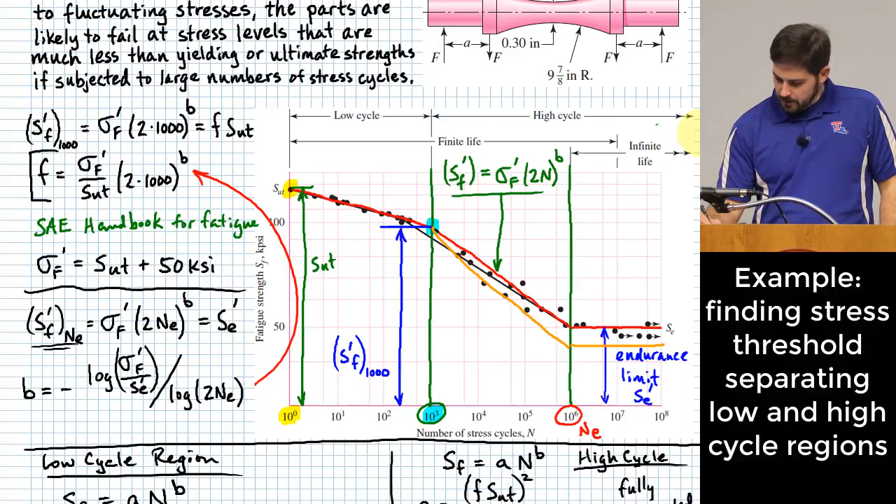Now what we want to do is look at the relative value between these two. The actual stress we're putting on it is 107.43 KSI. The amount of stress where we break from being low cycle to high cycle is at 105.6 KSI. Which one is higher? The stress we're actually applying, which means that if we go up and look at this chart, we're above this little knee in the curve, which means we're up here in the low cycle region. Okay, so that means we want to use these low cycle formulas.

All right, so the high cycle region happens at lower stresses. Right? So we're above that stress level, which means we're up here in this range of the curve. Okay, so we'll go down here and use these formulas. Okay, what is A? What is B?

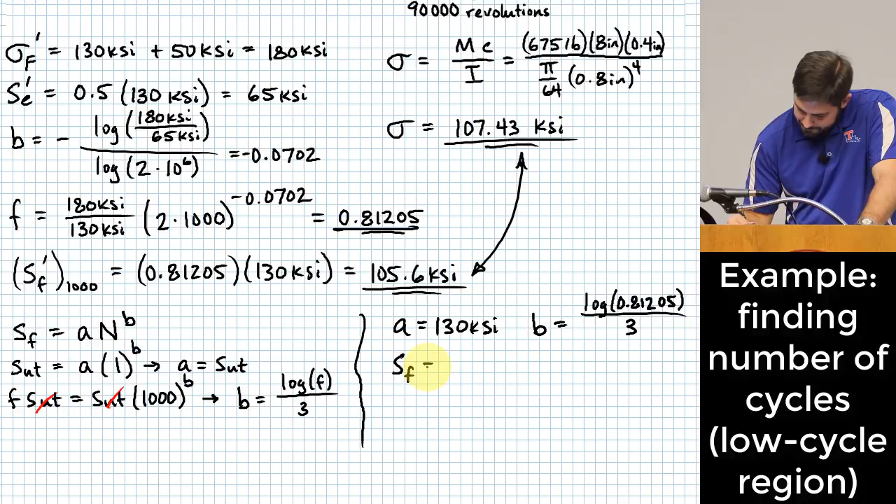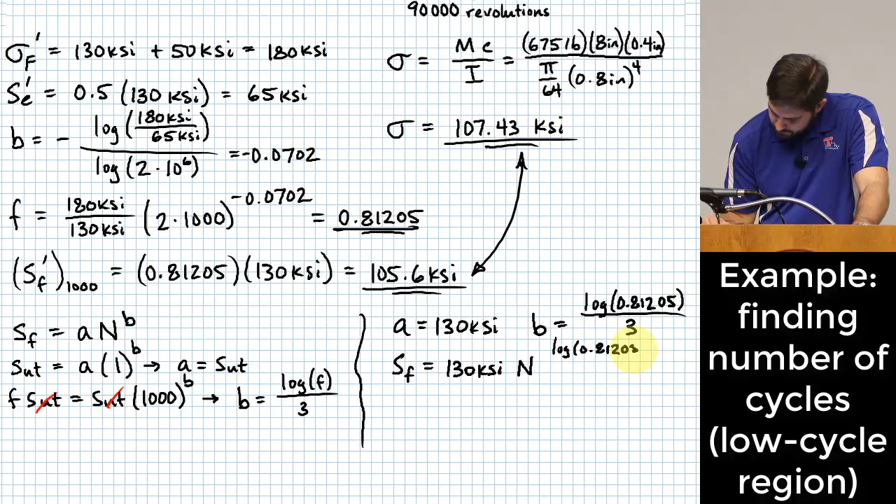Okay, so then that means our strength value, S sub F, is going to be equal to 130 KSI times N - that's what we're going to try to solve for - raised to the B, of log of F over 3. What do I do with this? This is a strength value I can set equal to something else. Instead of just setting that as the strength value, if that's the actual stress value we're applying, we have that number - that is 107.43 KSI.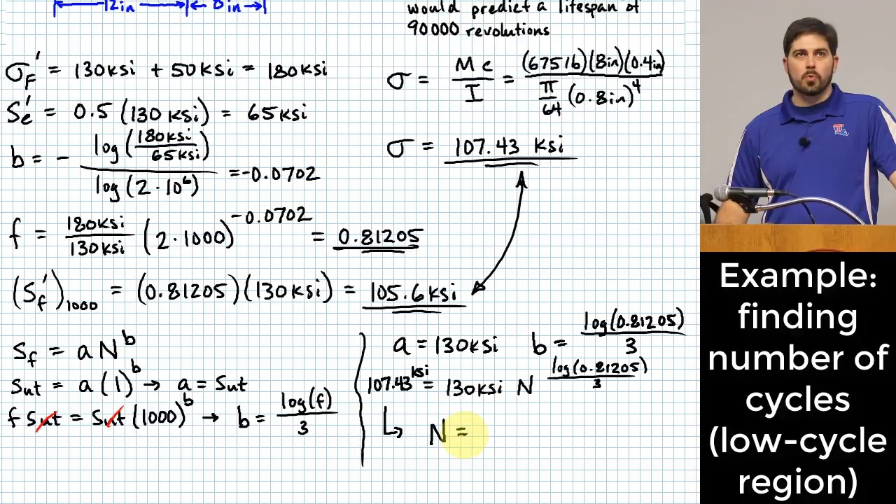By the way, get comfortable using your calculator for this. You can use your Casio or TI calculators, just be careful because it is kind of sensitive to what your initial guess is, so it's worth practicing a little bit. Make sure you're comfortable using it for that purpose. The N that comes out of here is 559.6 revolutions.

Do we know it that accurately? Do I know that it's not 560, it's 559.6? Being a little facetious - no, we do not know that. We're making a guess, it gives us an idea. But it's worth doing in some cases so you have some ballpark idea of how many cycles it might run.

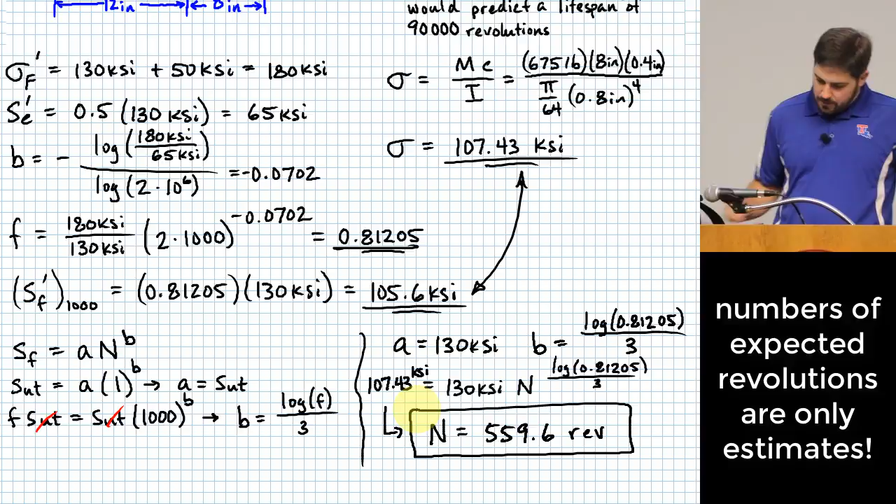All right, what's our next step? Okay, now we've got to say, or we don't want to do that - let's see how much we have to reduce the weight by in order to make sure we are not going to ever fail. What's our step for that, you think?

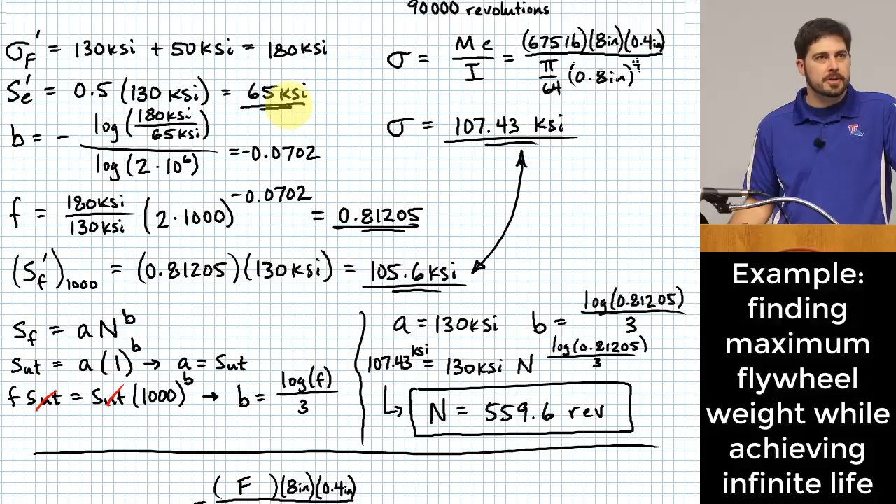We had all this stuff, but what we're going to do is change, instead of 675 pounds, make that a variable and call that F. And what do we set all this equal to? If we want it to never fail, then we want to make sure we're not going above our endurance limit. Right now we're not adjusting our endurance limit at all - we're just going to use the same one as we would predict for a fully polished rotating bending specimen, so we just put in 65 KSI.

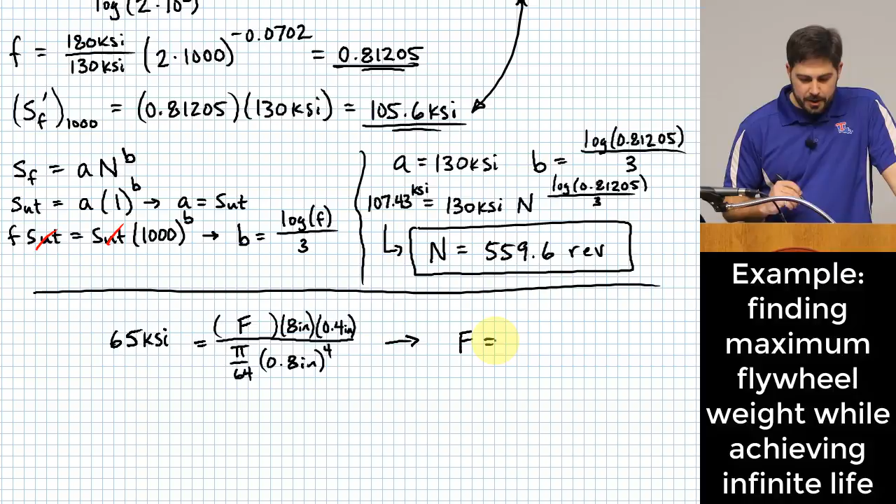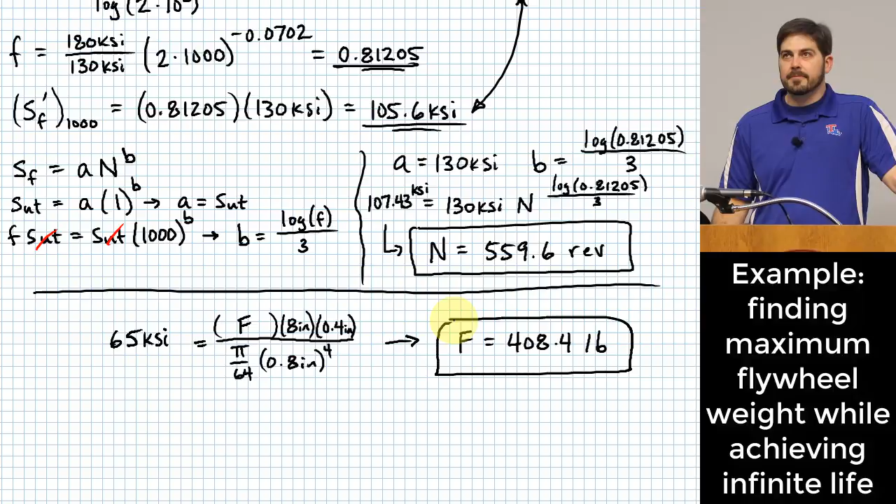If you solve now for F, you say don't put any more than 408.4 pounds. Then you would predict that it would last forever, assuming you don't need to do any more adjustment on S sub E, and assuming you're not trying to apply a factor of safety, and assuming there's a few assumptions there - but that's like you're right at the threshold.

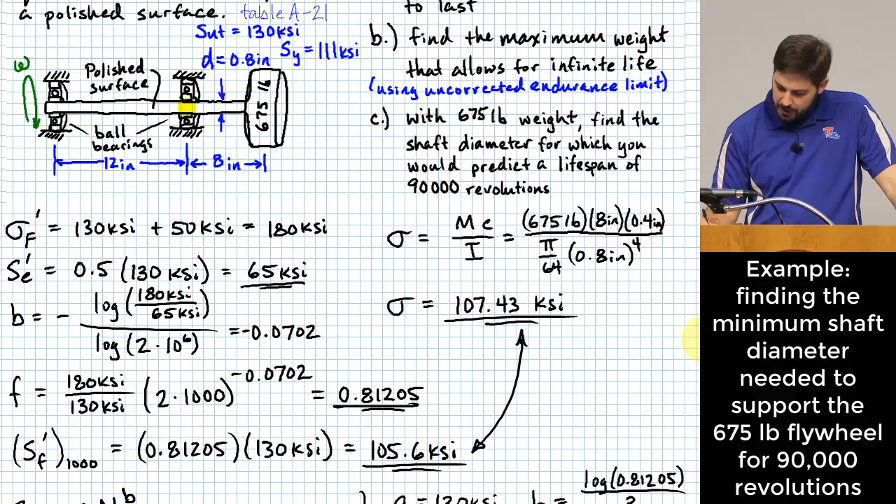What's our last question that we asked? Find a diameter so that with the 675 pound weight, we would predict a lifespan of 90,000 revolutions. So what equations would we need if we're wanting 90,000 revolutions? We want our high cycle numbers. At this point we're not making a distinction for this exact problem between fully corrected and uncorrected.

So what we can do here is we can say that 675 pounds times 8 inches times d over 2, over pi over 64 times d to the 4th - we're saying this is going to be equal to A, which is F, 0.81205, times S sub ut squared over... like I said a second ago, S sub e and S sub e prime at this point are not different, but they will become different at some point in later problems that we work.

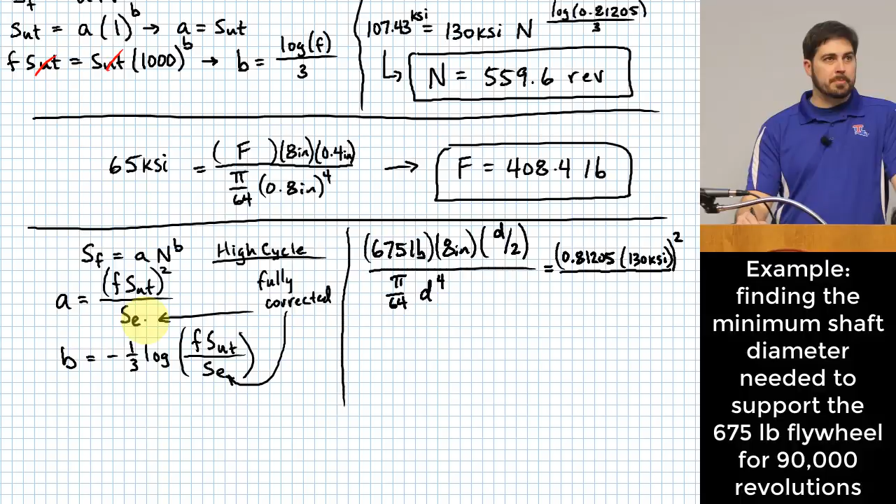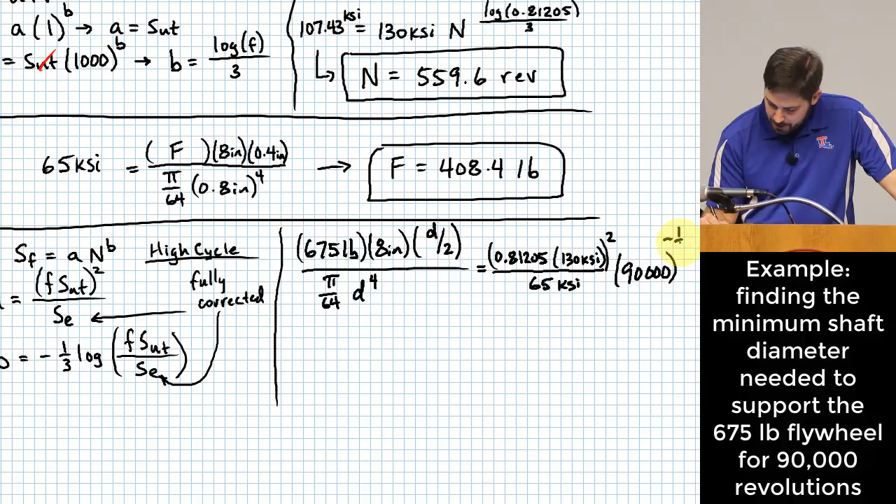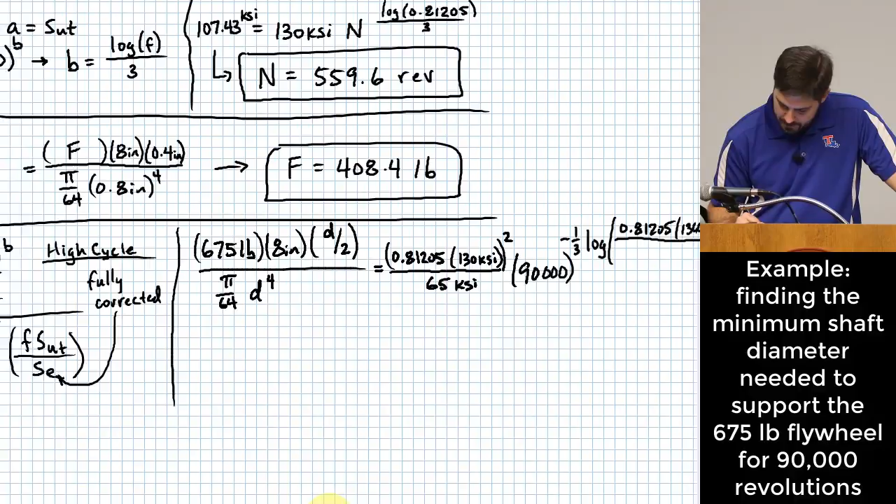All right, that was 65 KSI. This is multiplied by N, 90,000, raised to the minus 1/3 of what? Okay, we're over here - minus 1/3 log of F times S sub ut. We're going to run out of space over here, aren't we? 0.81205 times 130 KSI, and that was over S sub e, which is 65 KSI.

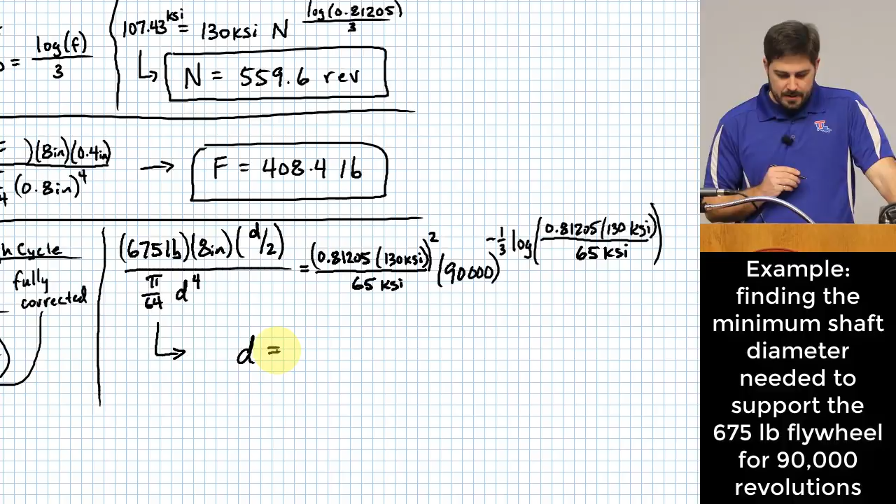And solve for D. The D that makes this happen is 0.894 inches.